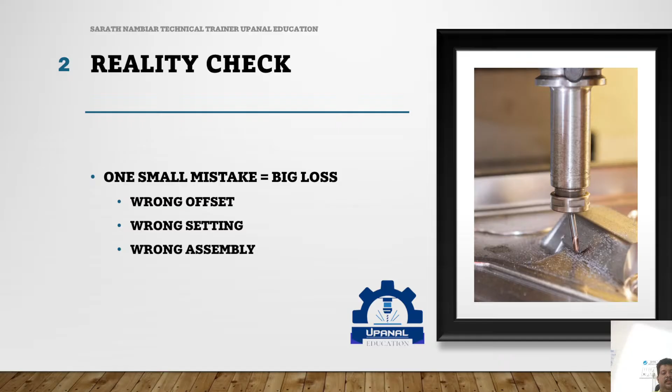Now, the question is, why do mistakes happen? Let's be very honest, it's not always lack of skill. Even experienced people make mistakes. Why? Because we are human. We get tired. And after long hours, focus reduces. We get distracted. Someone calls, someone asks something, we lose concentration. Sometimes we become overconfident. We think, I know this, no need of checking. And that is when mistakes happen.

Let me give you a simple daily example. Have you ever locked your bike, walked like five, six steps, then came back again to check? Why? Because we are not machines. Same thing happens in the factory. So if a system depends fully on human memory, then mistakes will definitely happen. So instead of blaming people, we improve the system.

Now, let's understand the solution. Let's come to the point. Let's come to foolproofing. What is foolproofing? Foolproofing means we design the process in such a way that mistakes either cannot happen at all, or if they happen, they are immediately detected before the damage occurs. Simple idea, but very powerful.

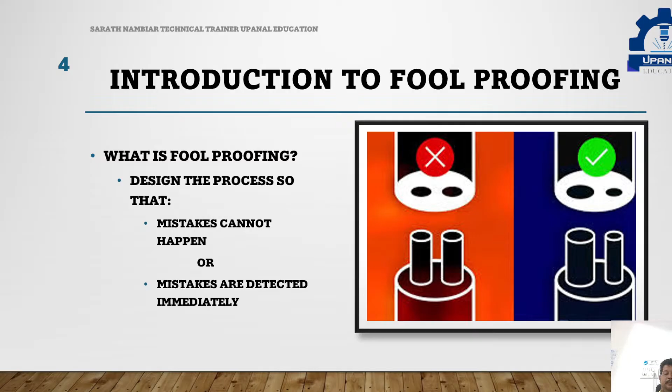Now, I want you to remember one line, very important. If a mistake is possible, the design is wrong. If a part can go wrong, one day someone will put it wrong, 100% sure. So instead of saying, be careful, do not make mistakes, we change the design so that the mistakes never happen in the first place.

For example, if a mobile charger fits both ways, then you will get confused sometimes. If it fits only one way, you cannot make any mistake. So, what do smart factories do? They don't blame people, they improve design. That is the difference. Simple definition. So, foolproofing means only two things. One, no mistake should happen, or if a mistake happens, catch it immediately. That's all.

Simply, in simple words, if you explain: seat belt warning in a car. If you don't wear it, what's happening? Alarm comes. That is detection.

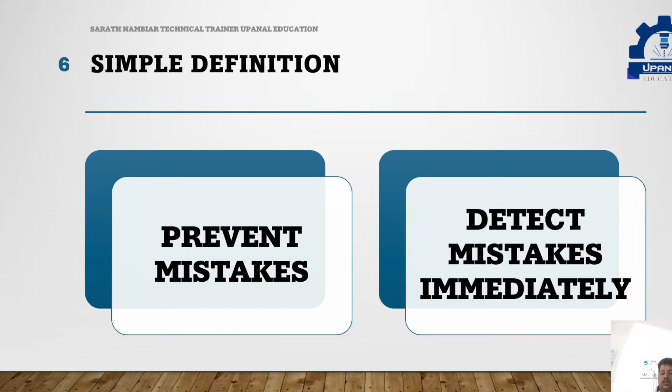Now, daily life. So foolproofing is already around you. You are using it daily. SIM card, as I told, one corner cut, only one way it will go. ATM card, the strip is on a special side. It will go only in one direction. Gas regulator, if it locks properly, it cannot connect wrongly. Why? So the mistakes don't happen.

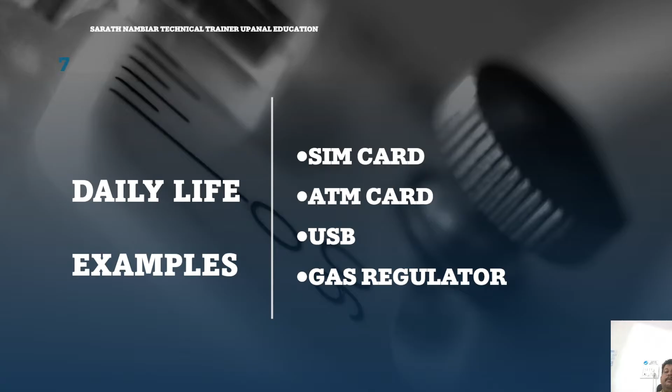Even the USB pen drives which we use, always we get confused whether it has to be taken upside down or how we have to put it. It won't go both the sides, right? Nowadays the C types have come. The older type A, it will go only in one side. Why? This is because this is known as foolproofing. So this system is already working in your life. The same thing we are going to implement in the factories.

Now, a simple question. If foolproofing works so well in daily life, why can't we use it in manufacturing? Why should we depend only on skill, only on experience, or only on memory when we can design systems that guide this operator? This is exactly what smart factories do.

They don't assume that the operators will always remember everything perfectly. Instead, they create systems that support the operator. They reduce the chances of error. They simplify the process and slowly they move towards a zero defect production. So foolproofing is not about replacing people, it's about helping people work without mistakes.

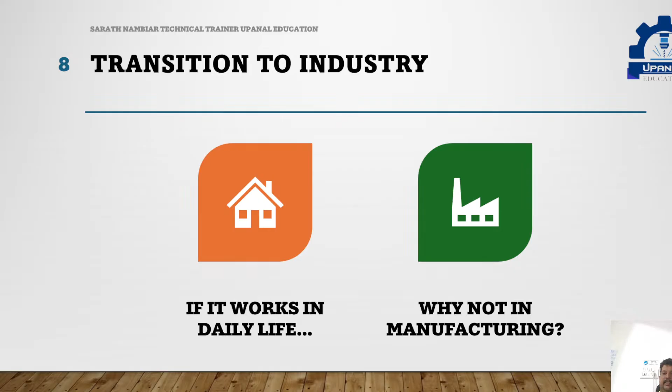In industry, the goal is simple: no mistakes, not less mistakes, no mistakes. Because even one small mistake means loss. So the companies try to remove chances of error, and foolproofing helps achieve that. Better quality, less stress, and better production.

In many small industries, the goal is like reduce mistakes, but in advanced manufacturing, the goal is different. The goal is zero defects. Now you may think zero, is that even possible? In reality, it is very difficult. Yes, but that is the direction industries move towards. And foolproofing is one of the main tools to achieve this.

Because when you remove the possibility of error, quality becomes consistent, output becomes reliable, and customer trust increases. So, this is not just a technical concept, it directly affects the business success.

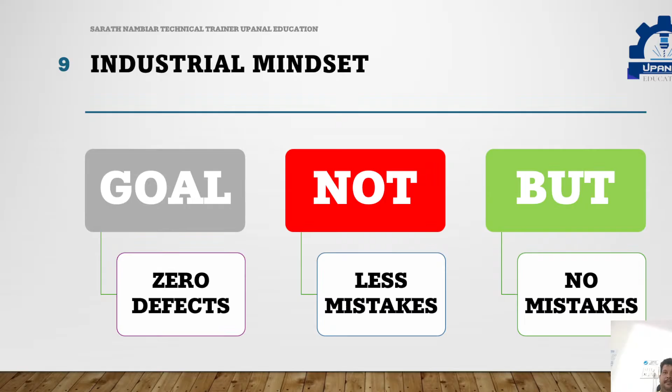So, now since we have understood what foolproofing is, let's make it even more clear by dividing it into types. Because once you understand the types, you can easily identify it anywhere. There are mainly three types of foolproofing used in the industry. First, prevention, second, detection, and third, warning. Don't worry about the names. We'll be explaining each one in a very simple way.

Just before we go in detail, think like this. Prevention means mistake itself cannot happen. Detection means mistake happens but we catch it immediately. Warning means mistakes happen, system gives alert, but we have to act. So these are like three levels. The best level is prevention. Next, detection. And the last level is warning.

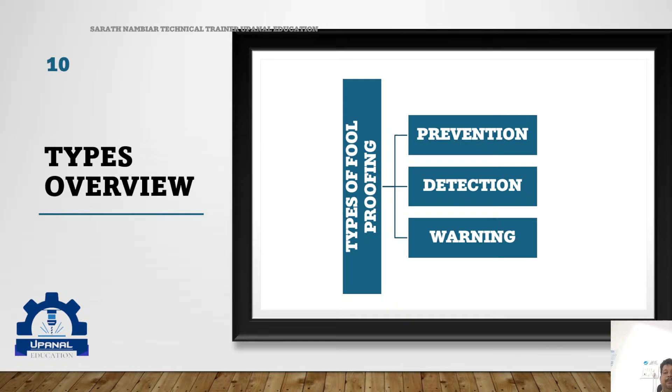Let's discuss a simple daily life example to understand all this. Imagine you are filling petrol in your bike. Fuel nozzle fits properly, no leakage possible. If tank is full, auto cut happens. Warning, fuel indicator shows low, but you have to take action. Right? Fuel indication shows means you have to go to the petrol pump. Same ideas in the factories. Now in the next slides, we will see each type clearly.

Prevention type. First type and the best type is the prevention. Here, the mistake cannot happen at all. Not reduced, not controlled, completely eliminated. This means mistakes cannot happen at all. This is the strongest type of foolproofing.

Let me give you a real shop floor example. In CNC fixtures, we use locating pins. The part has holes matching these pins. So the part can sit only in the correct position. If you try a wrong position, it will not sit.

Another example I will tell you. The mobile charger cable, not the C type. It fits only in one way. You don't think, you just insert. So this is prevention. System is smarter than human. And always remember, this is the best method because mistake never even gets a chance.

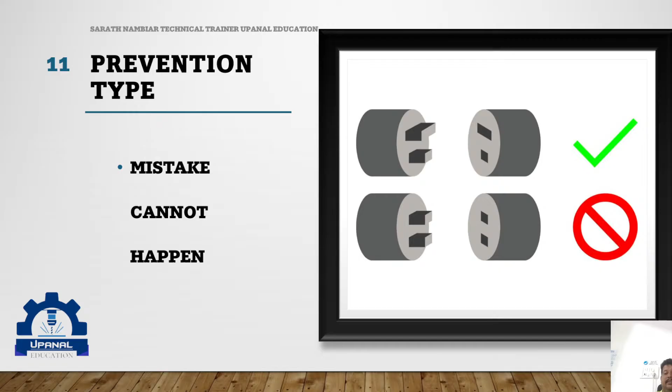Now the second type, detection. Here mistakes can happen, but system catches it immediately. So the damage is controlled. Let's understand clearly. In prevention, we stop mistakes from happening. But in detection, we allow operation, but we keep checking continuously. The moment something goes wrong, system reacts. For example, in a CNC machine, suppose the tool breaks.

If the machine continues, the part will be completely damaged. But if there is a sensor, it detects the tool break instantly and the machine stops, right? Now, what happened? A mistake happened, but the loss was controlled.

Another example, the part presence sensor. Sometimes the piece may not be kept on the table before pressing the start button, or maybe due to some clamping issue the piece might have flown off. In such cases, the machine will check for the part. The machine will not start. The system checks before operation.

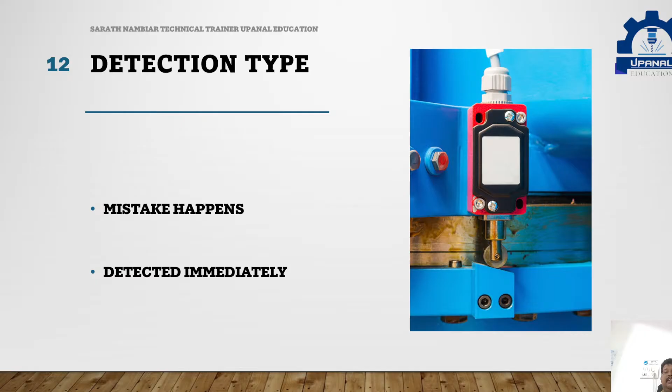Like in most two-wheelers now, if you try to start with the side stand on, will it start? No. Why? An alarm will come that you have not placed your side stand. It detects your mistake and helps you to correct it. So detection means the mistake happens, but the system is alert and reacts fast. It is not as strong as prevention, but still very useful.

Now the third type, warning. The simplest type. Here mistakes happen, and the system gives a warning, but it does not stop you. You have to take action. In machines, for example, you see the red light blinking or the buzzer sound. That means something is wrong. And sometimes the machine may still run unless you stop it. So here the responsibility is still on the operator.

A simple daily example, the mobile battery low warning. The phone will show 10%, but will it switch off immediately? No. You have to charge. If you ignore it, the phone will die. If you stop and charge, it will work.

Same in the factory. Warning systems are helpful, but not fully safe because they depend on human response. If the operator ignores it, the problem continues. That's why warning is considered the weakest type. It's still useful, but not the best. So always aim for prevention first, then detection, then warning.

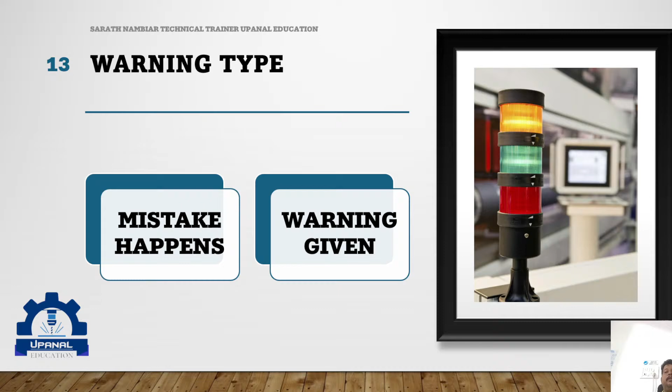Now, let's move into CNC machines. This is where things become very real, because in CNC, mistakes are very costly. Think about it. The machine runs at high speed. The tool is cutting continuously. Material is expensive. If something goes wrong, there is no time to correct. Within seconds, damage happens.

Let me give you a situation. You give the wrong tool offset. The machine starts. The tool goes deeper than required. Obviously, the part is damaged. Or sometimes the wrong tool is loaded. The program runs. The operation fails, right? So in CNC, we cannot depend only on operator skill. Even experienced people can make mistakes. So what do industries do?

They add foolproofing. They use fixtures that guide the part correctly, sensors to detect the problem, and systems to verify tool and offset. Instead of trusting memory, they trust the system. That is why smart factories don't trust humans alone. They support humans with systems. In the coming examples, we will see some real CNC foolproofing examples.

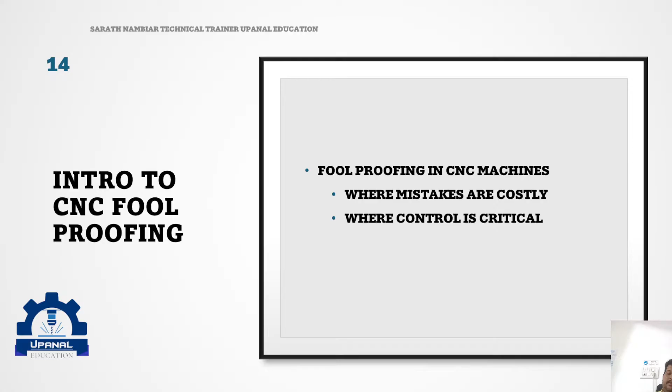Let's take the most common CNC mistake, the wrong offset. This happens even to experienced operators. Maybe you entered the wrong value. Maybe you forgot to update after a tool change. The machine has no brain. It does not know your intention. It will only follow the program exactly as written. If the offset is wrong, the tool will go deeper or higher than required. Within seconds, the part is damaged, material gone, time gone, sometimes the tool also gone.

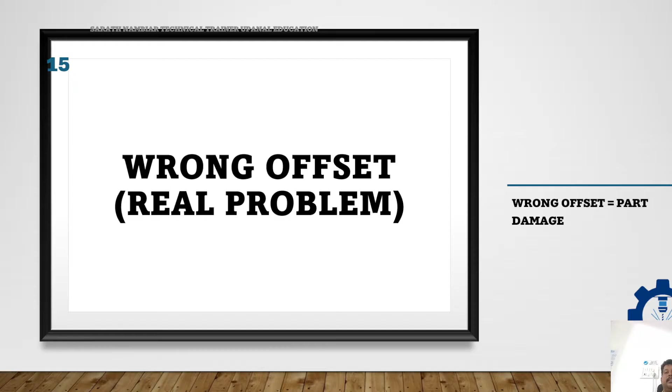Can we stop this? Instead of telling the operator again and again to check properly, we can use foolproofing. We use tool presetters. Before running, tool length is checked automatically, or an offset verification system is used. Will the machine know it? No, the machine is not going to know. It will just run. And the result: wrong dimensions, the part will be scrapped, sometimes even a collision.

So what can we do? We can use tool identification systems like tool tagging or tool measurement systems. The machine checks whether the correct tool is loaded. If not, it will not start. A simple idea, but very powerful. We remove the chance of mistake.

Now let's talk about the fixture. This is one of the best places for foolproofing, because the fixture controls the part. If the fixture is designed properly, half of your problems are solved. Example: use locating pins. The part fits only in the correct position. Wrong position? Not possible. Use stopper blocks. Parts cannot move. Clamping designed properly: no vibration, no misalignment. So instead of depending on operator skill, we depend on fixture design. A good fixture means fewer mistakes, and this is a good example of prevention type foolproofing.

Now, imagine one situation. Operator forgets to place the part. I told you already. But the machine has started. What will happen? The tool will be cutting in the air, or it may even hit the fixture. The damage is possible. So what do we do?

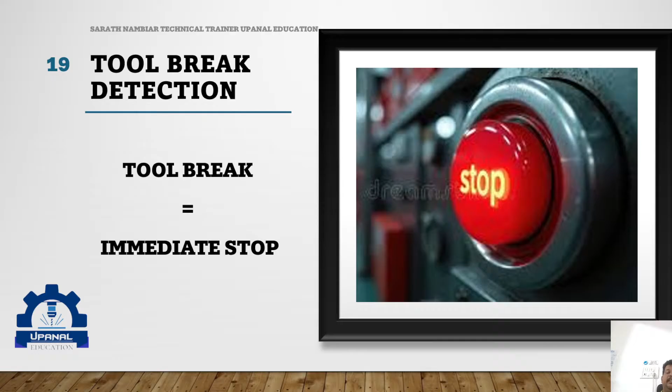Tool can break, and if the machine continues, part is completely damaged. So we use tool break detection. System checks the tool condition. If the tool breaks, machine stops immediately. So mistake happened, but damage is controlled. This saves material and saves time, and also reduces the scrap.

Now, let's see why all this is important. First, less scrap, then less mistake means less rejection, better quality, output becomes consistent, it saves time, no rework, no correction, and also mainly the operator stress is reduced. No fear of making mistake. Work becomes smooth. So foolproofing is not only technical, it improves the overall system.

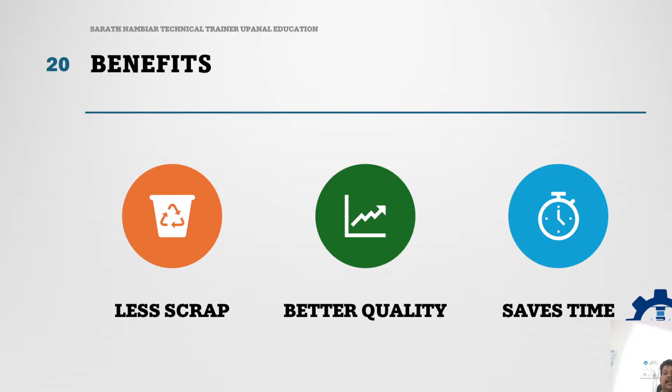One important thing, foolproofing is not against the operator, it helps the operator. It supports him. Instead of saying don't make mistake, we say system will help you avoid mistake. So what happens? Even a new person can work safely. Confidence increases and work becomes easier.

Final message. Now let's slowly bring everything together. Throughout the session, we saw many examples: CNC mistakes, wrong offset, wrong tool, wrong setting, and we also understood something very important. Mistakes are not always because people are careless. Mistakes happen because we are human. We get tired, we get distracted, sometimes we assume instead of checking. So, if a system depends only on human attention, then mistakes will definitely happen one day. Maybe not today, maybe not tomorrow, but one day it will happen.

So, smart factories don't take that risk. They don't say train the operator more, warn him more. Instead, they ask a different question. They ask, how can we design this system so that the mistake becomes difficult or impossible? That is the shift from blaming people to improving process.